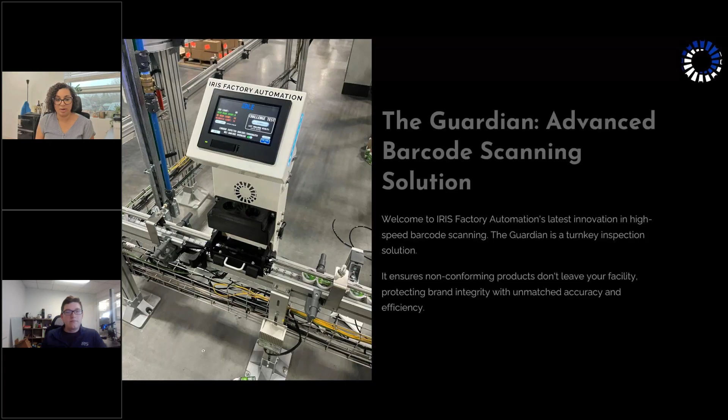So we'll get started. Just a little background about Iris for those of you who are not familiar with Iris Factory Automation. We were founded in 2013, and we have grown as a trusted partner for end-of-line packaging automation. We focus on robust, factory-proven solutions that streamline and enhance the end-of-line manufacturing process. Specifically, over the last 11 years, we focused on pre-engineered robotic palletizing, as well as custom palletizing, robotic case packing, and machine vision inspection solutions.

So today we're really going to talk about our inspection, barcode scanning in particular, but just to give you an idea of all the things that we work on as an organization.

Our team is backed by a lot of engineers. We have a full mechanical design team, robotics, controls engineering team, as well as electrical and assembly team that builds everything in our shop, and a field support team.

Some of the members here that I wanted to highlight today are the commercial facing group. Rob Fell is our president and founder. He supports all of us, from engineering to sales, and he is a great resource and has been the backbone behind Iris and our designs and innovations.

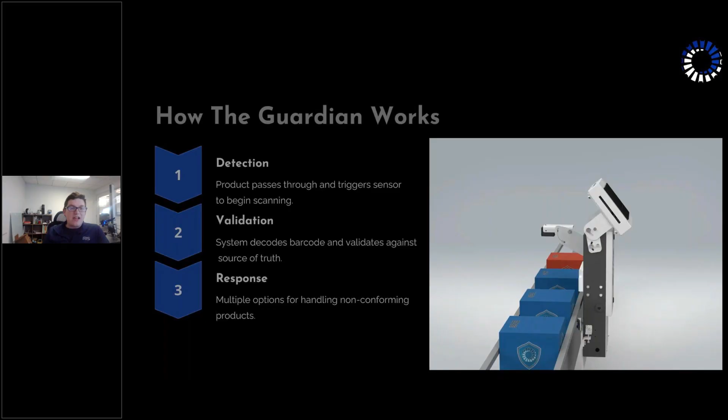So at a very, very high level, how the Guardian works is by detection, validation, and response. We boil it down to that specifically because we can customize all three aspects of those. So for detection, we're going to have product come through the system triggered by a photo eye, and that triggers the camera to start inspecting. At its core, the Guardian is a barcode scanning system.

So typically that is triggering a barcode scan to read a code, and then the next step being validate. Make sure that the code that it read is in fact the correct barcode. And that validation process can be configured in numerous ways, and we'll get into that a little bit further on. And then finally, what is the response when we detect something? So if it's good, typically that response is let it through the system and just keep chugging along.

If it's bad, we have multiple options for what do we do. We can reject, we can apply a product brake so it stops the conveyor as well as physically restrains the faulty product to make sure that no non-conforming product ever gets downstream in the production space.

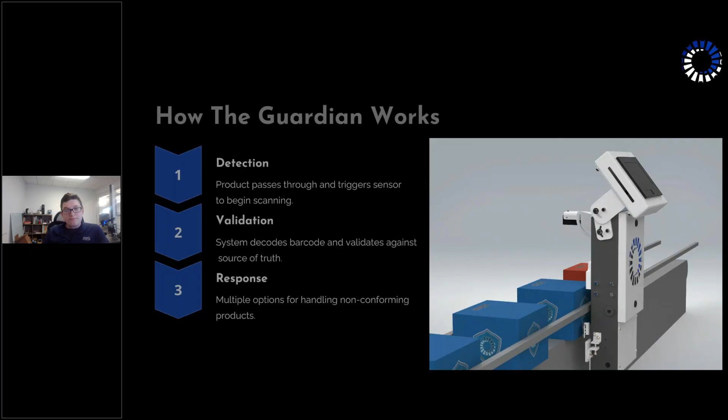And so, what does that ultimately mean for our clients? Really, highest level, the purpose of any inspection system is brand protection, right? We want to make sure that no non-conforming product leaves your facility, whether that's non-conforming because it's got the wrong label on it, the wrong lid, it's marked as a non-allergen product but what's inside is actually an allergen, or for our co-manufacturers out there, you don't want brand A product going out in a brand B package. So we're making sure that none of that stuff happens and protecting the clients in that sense.

We really highlight in the Guardian system the downtime elimination. So we want to keep productions running through both the installation and integration, but also keep them running in terms of not having to have costly stops and costly audits when an escape happens and is discovered. There's no need to stop the entire line necessarily and scour the system, make sure that there's no other non-conforming parts in there, right? We want to keep you moving, and we'll stop it, let you remove it, and keep on going.

And what's nice about this is a turnkey system. You don't need any experts on vision, barcode reading, PLC controls, nothing. This is a turnkey solution. It's going to bolt onto an existing conveyor, and we can integrate it as much or as little to your existing controls infrastructure as required.

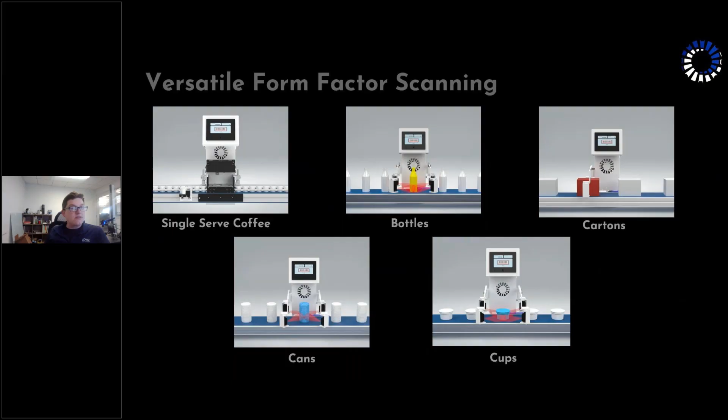And then I kind of highlighted earlier, turnkey solution, right? What does that mean? It means that we're able to plug and play during the integration phase. So we've designed this to be very small, to have as minimal impact on production as possible. So what that results in is a sub 10-inch system in terms of length on conveyor.

So as long as you have a gap on your conveyor somewhere that we can mount up to that has 10 clear inches, we can put a system on there and be inspecting parts, like I said, within an hour because it's ready out of the box. Our install process is bolted onto the conveyor, we plug it in, and we supply air if we go with any sort of air rejection. At its absolute minimum, those are the three things that we need to do.

As far as power, this is 24 volts, or if you've got an existing 110 outlet, we can plug into a 110 outlet and consume like 3 amps of 110. And then the third aspect of this is the onboard controls. So you don't need to have a PLC nearby that this is going to talk to and get it integrated with the rest of the production line. We handle all of that. Everything is handled on board.

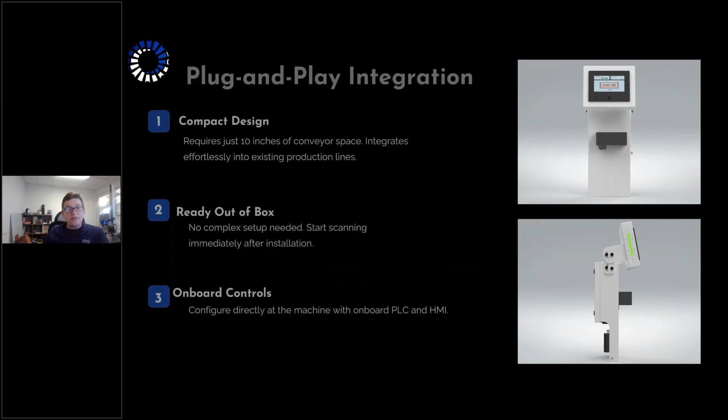So in the worst case scenario where you say we don't want to integrate with our system at all, great. We can put an air rejector on there and just blow or punch product off. We can put a brake there that then can be detected through any sort of upstream backup sensors, or we can add our own integration to more gracefully stop production lines. And a lot of that can be configured right from the onboard HMI there.

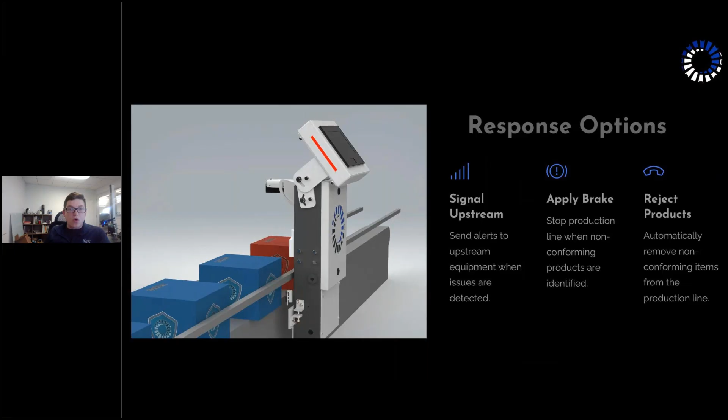So you can handle configurations as far as reject response, reject timing, controls as far as what good product is or not, right? One of those things that you're going to configure is the response options. So the three major response options that we have is signaling the upstream equipment to stop production because we've caught something defective going through. That could be done through discrete I/O or EtherNet/IP or Profinet communications.

We can apply a product brake like what's shown in the animation right now, where we're going to actually apply a brake that's going to put positive pressure and pin the product up against an opposing rail. Ideally, that's paired with the conveyor stopping as well through an upstream signal. And then the third and final response option is reject product. So this requires no stoppage of production, no stop to the upstream equipment. We're going to see a bad part, we're going to kick it off and let the system keep running.

We do have some pre-configured options in there that you can configure. Yes, I want to reject every non-conforming part, but if I see, say, 5 in a row, that is a stop condition. Or if I see, we'll call it 7 of the last 10, again, that's a stop condition. And those are all configurable directly on the HMI. You don't need to be a PLC programmer to get in there and make those changes. You can just go to the HMI, toggle, and set your setting.

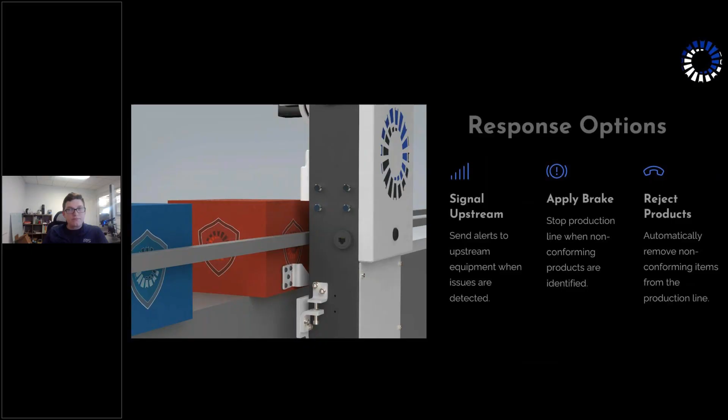Okay, so what is in the Guardian system? So like I said before, at its core, this system is a barcode reader system. So there's obviously the barcode reader itself. We do have a small micro PLC on board that handles HMI controls and all that. It handles rejection, barcode response, trigger response. We monitor for external errors on both the readers and the air input. We've got a built-in pressure switch. We've got the trigger sensor as well. And then the touch panel HMI.

The touch panel HMI is where you're going to be able to see counts: how many products have gone through, how many good, how many bad, how many times a product has gone by that we haven't read a barcode. And then what do you want to do when you see a no good? A no read? Is that the same as a no good? Do we let that go by and ignore it? And you can have your own thresholds on those settings as well.

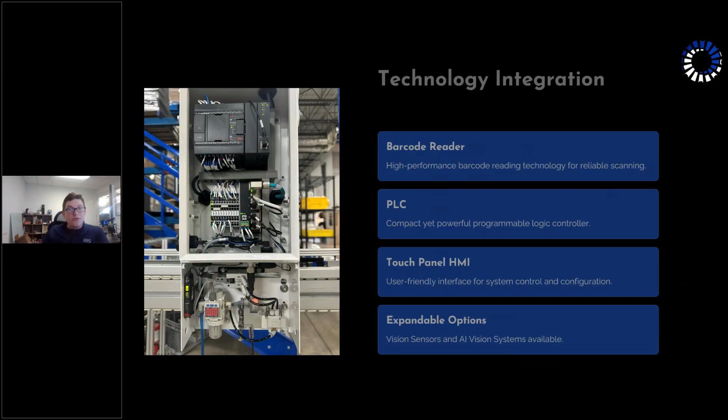And then finally, these expandable options. At its core, the Guardian was designed to be a barcode reader, but we do have options to upscale those barcodes to some simple vision sensors and some not so simple vision sensors. So we've got product that has AI OCR detection in more of a simple vision sensor form factor.

We've got full-blown vision systems that can do AI detection for random defect detection or classification of, say, a product that doesn't have a barcode, but we know that there's 25, 30 different flavors of products that run on a line that don't have a barcode to identify, we can use the graphics and some AI vision to determine that with very minimal programming.

And the key to that is easy access to that model to update it if graphics change, because marketing departments like to change graphics. Everybody always wants to see the newest, latest, and greatest. So we've designed a system that incorporates technology that makes those changes easy for our clients to handle.

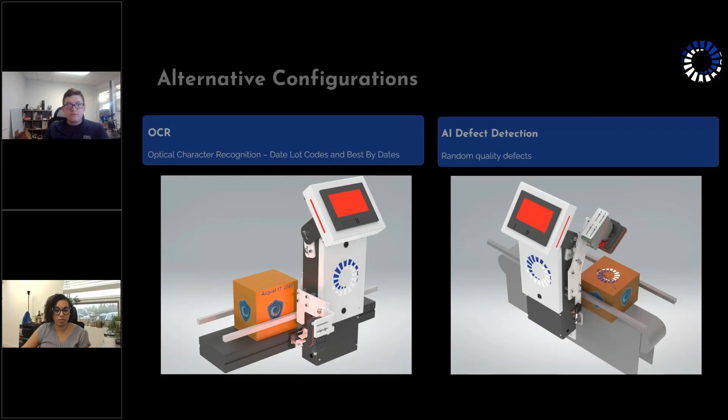All right. So thank you, Chris, for giving an overview. We're going to move to some other information that I will cover, and Chris is going to run down to the shop to get the demo prepared for the ending of this webinar. So I will let you go ahead and run down there, and I'll keep things going.

All right, thanks. So we serve a wide range of industries with this product, including food and beverage, personal care, automotive, consumer goods, really where product verification and traceability are critical. We've seen a lot of success though in food and beverage. I think that really has been the sweet spot for this with single serve coffee, cartons, bottles, cans, really all of those that fit within that food and beverage space. This has been a really successful product for them.

The Guardian solution starts at $25,000, which is really a huge value for a turnkey system. So the pricing is going to vary based on the configurations and the amount of cameras that you'll use. And really one of the biggest advantages of this system is to allocate your own engineering and programming or installation resources to some other task, right? Taking up those resources to design and program this type of solution can be costly. So we're going to deliver you a turnkey solution at a pretty reasonable investment.

So the range really can be anywhere from 25 to 35,000 depending on what camera configuration and what type of rejects that you're going to use. As far as hardware, we offer flexibility in the hardware selection. We work with leading camera providers like Cognex, Zebra, SICK, and Keyence. So really, whatever fits your specifications for your plant, we're willing to work with you to provide the best solution that fits within your scope for the project.

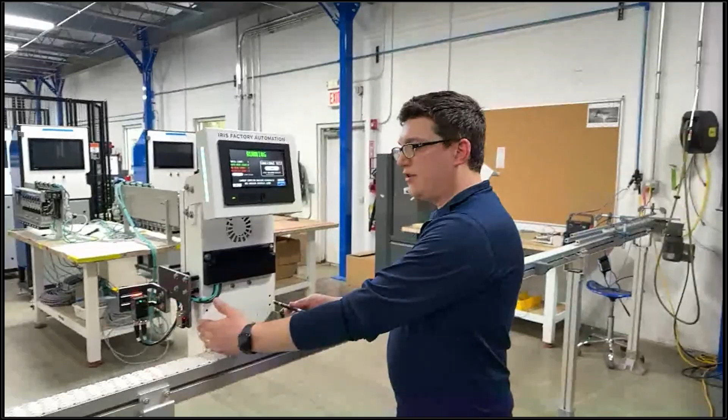So one of the things we talked about earlier was small form factor. So form factor here being your 8 inches out to out on the box itself. And then we add a couple inches off to the side here when we get to the actual reader itself, which is going to scan.

One of the things that you'll see in this is as I block a reader, it's going to keep scanning. It's going to give me a warning in that case because it had consecutive no reads. So as I scan that, it is continuously triggering. So as long as something's blocking, it's going to be looking for a code, and it's not going to register a no read until it stops blocking it.

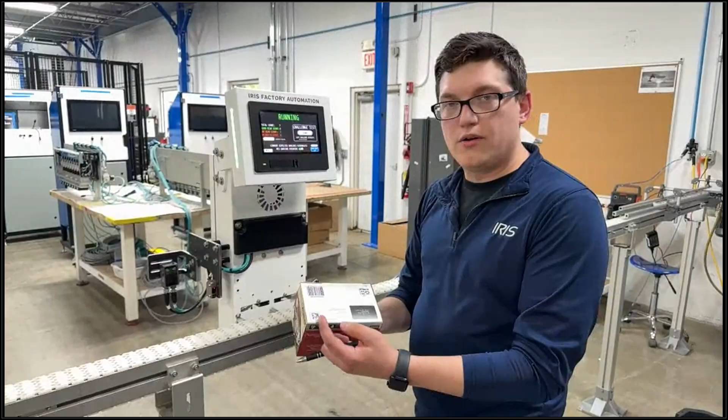What that is really nice for is as we run product through, if you've got a longer product, you don't have to get the entire product in the field of view to get the code. That code, as it traverses, can come through. So even if it's not in the field of view when you first trigger it, when it gets into the field of view later, it knows that that's still the same product because it never lost that trigger.

So I'll highlight a couple of really nice-to-have features that are creature comforts. We've got LED lights that span all the way across the side, top, and bottom of the HMI box. That's going to let you know the rough status of the piece of equipment. If I throw a no good product in here by hand, it'll let you know. So flashing red is bad. There's an alarm. I can reset that. And we can put those resets, especially for non-conforming product, behind any sort of user login password to make sure a supervisor needs to come by and reset.

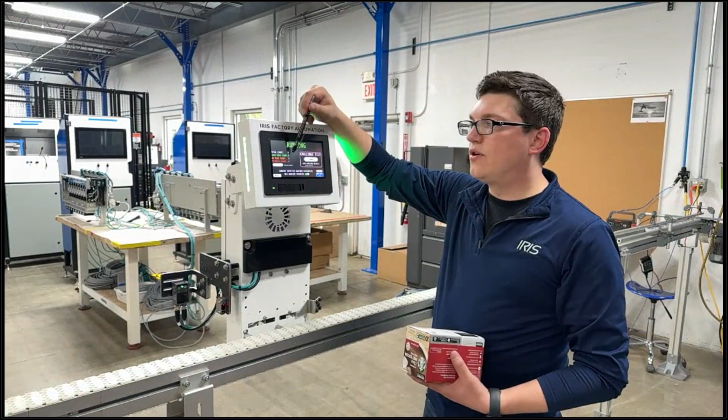So at a high level on the HMI, it's going to give you an overall status and some counts: good, no good, no read and mismatch. We can do challenge tests where you put a bad part through; it won't count towards your negative metrics, but it'll verify that everything is up and running so you never get caught without it running. We can override manually what code we want to read. We can also receive that from any sort of onboard system that might track that internally that you have in place already.

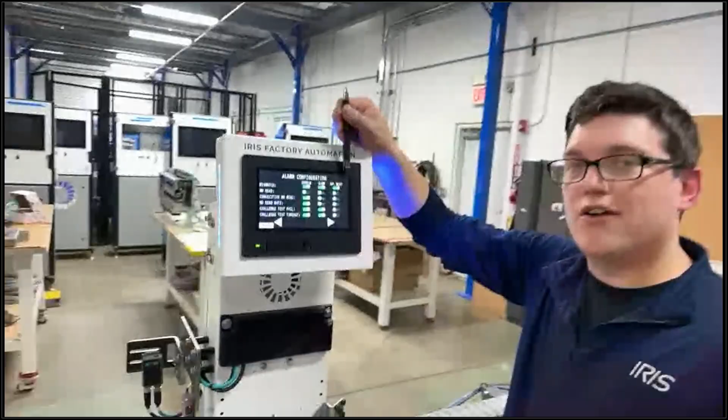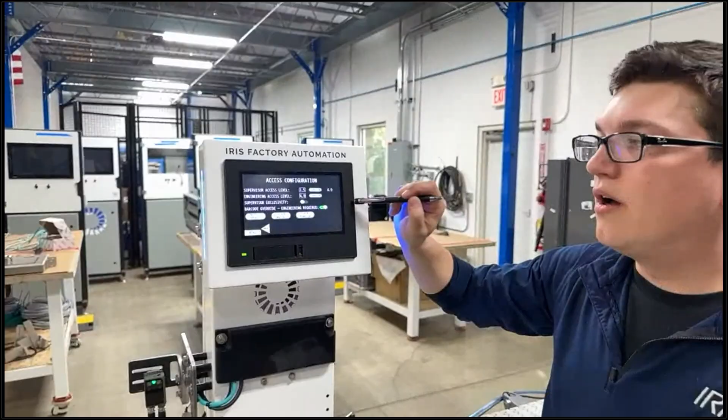As we go through the menus, this is where we're talking about all the configurations. So I can set how many no reads in a row is bad, no read rates, break delay or reject delay. We can enable the system, and then we can configure alarms. So I can have here that any mismatch is an alarm. It's enabled, it's an alarm. Enabled means it'll tell you if it happens, even though it's a warning. Alarm will stop or reject. And supervisor reset requires us to have somebody log in. So every single alarm is configurable to that extent. And then you also have some higher access controls as far as who can change what settings.

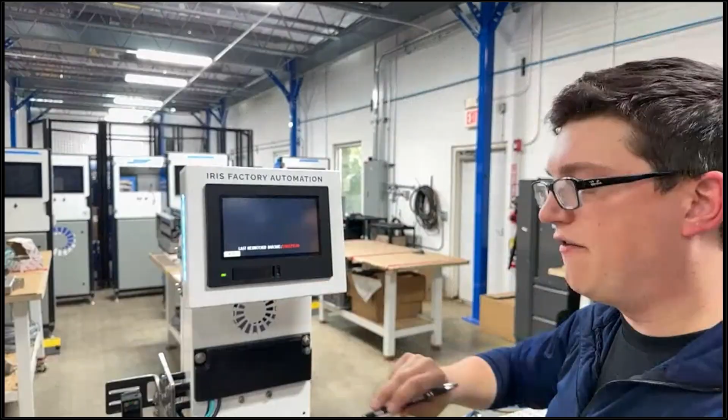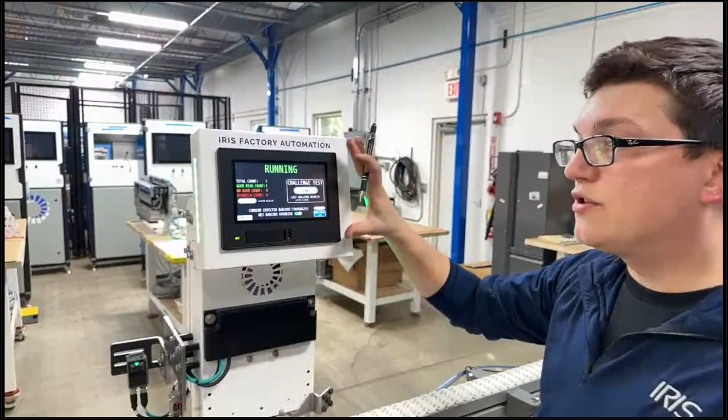We have a quick diagnostic that'll tell you status of inputs and outputs. We put a QR code on here, and that QR code will take you directly to the Iris support site. So if you ever have a question for one of our support engineers, you can follow that on your phone. It'll take you directly and you can submit a ticket. And then we can get a live stream view into the reader on the screen, so you can see what's happening on the reader, as well as what the code was the last time there was a mismatch. And finally, you've got alarms, both active and alarm history. So it's a small HMI, but it has a lot on here and really allows for user configuration as a whole.

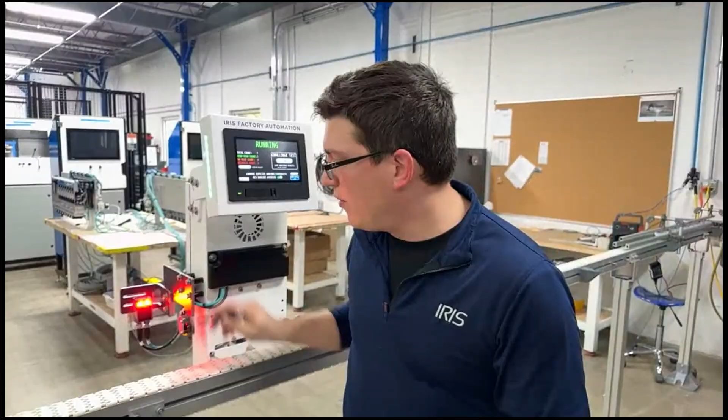So as we talked about, you have a programming port on the side for the reader code. Right now we have a Keyence reader on here. These systems can be configured with any number of readers and brands. So Keyence, Cognex, SICK, Zebra, any of the big names we can integrate directly into the system, really with no major changes. Same functionality throughout. So we'll go straight into a demo showing what it does on a carton system.

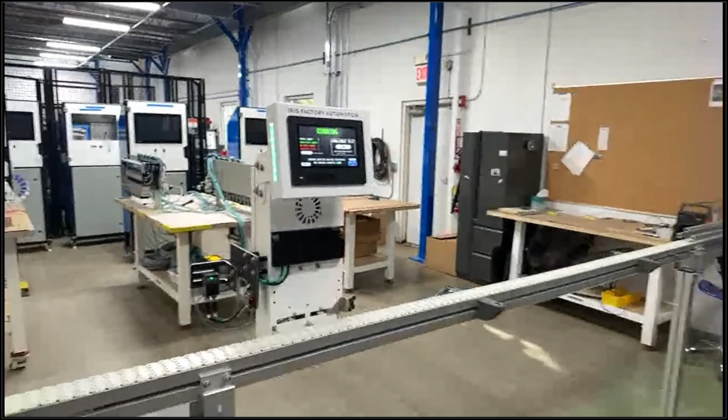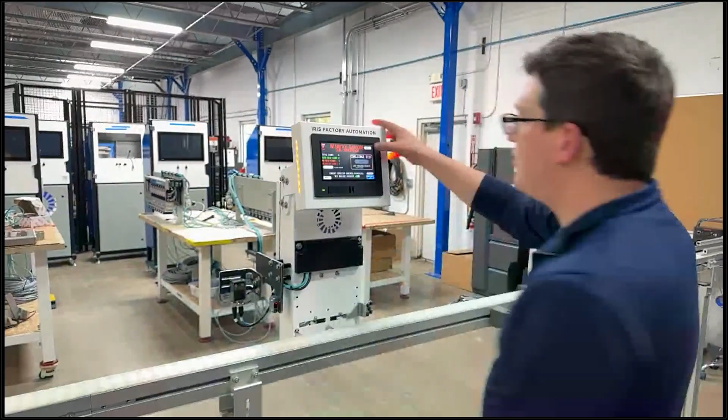So first, just throwing in some good product, showing that as it reads the correct code, we'll go through. And if we throw the wrong product on, it'll fault, pick it off, and then that is going to require me to reset with a supervisor level and start again. So another example of bad product going through.

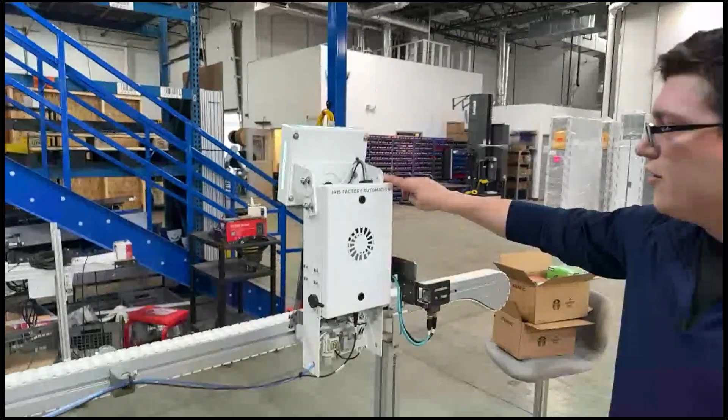So good product, and then another bad, picked off. If you want to walk around and show the backside too, just do it real quick. Yeah. So on the backside, you've got your electrical panel here that has all your electronics that we showed earlier, PLC, Ethernet switch, and terminal blocks for power distribution.

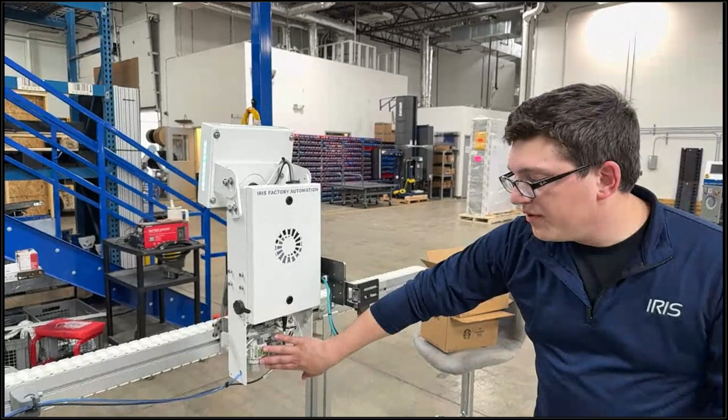Down below, we've got the filter regulator with a digital pressure switch, so we can monitor to make sure that we have adequate air to handle both rejection and cut brakes. A high-speed solenoid, and then right down here is a pneumatic actuator that handles that rejection mechanism. Again, that can be changed out for an air knife if we do air blow-off rejection as well.

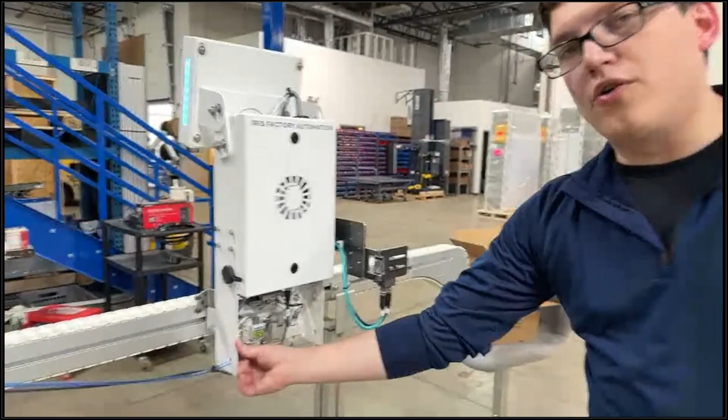And then you can see also our two utility connections. So in this case, it's a simple M12 4-pin electrical cable that goes to 24 volts, or can go to an on-machine power supply that will turn 110 into 24 volts. And then in this case, a 6mm or 1/4-inch air line for our air supply. That kind of covers us as a quick overview of what and where and how.

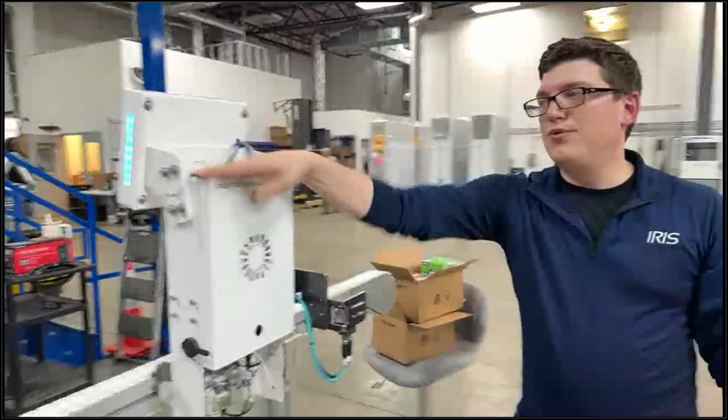One other thing I guess we can highlight is the HMI itself can actually tilt. So if you have that 8 inches of conveyor space that's necessary, but it's on an incline, we can be mounted on an incline, and this HMI can tilt up to, I believe it's 15 degrees, so your HMI is not on an incline, so it's easy to use still from an operator standpoint. So really designed it to be as flexible for installation as possible.

And from there we'll go to questions. One question we didn't answer, Chris, is how do you program new SKUs? Yeah, absolutely. So there's really four different ways that we can handle new SKUs. The most automated way is through integration.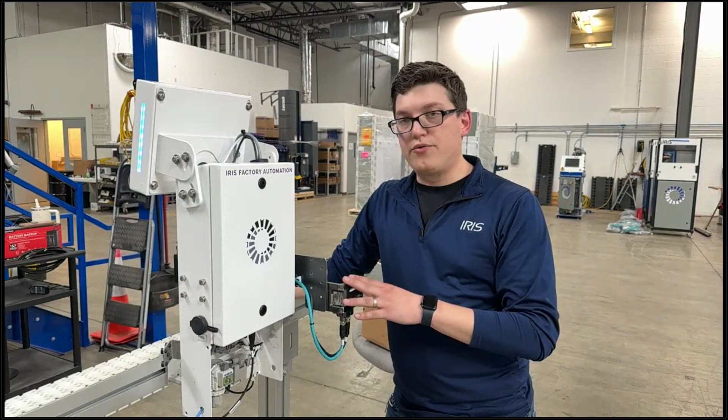We can integrate to a line side PLC or any enterprise level software that handles that, and we can actually take that code from a PLC or software that is supposed to be running on the line, automatically load that into the software, and send it to the barcode reader. So that's highest level of automation. Lowest level of automation is user input. There's a keyboard that you type in whatever the code is supposed to be, and then whenever you change that, it updates. And then there's the ones that are in between.

So we've got one that we can do either an external reading device, a handheld or fixed, or you can utilize the reader that's already embedded here, depending on the type of code that you're looking at, and scan a traveler. So the sheet that goes along with an operator as they set up the machine for a changeover, they can just scan that. That'll populate whatever the barcode is and set it up that way.

And then the fourth way is there's a button on the screen. It's just set correct barcode, and the first code that this scanner reads is what the code will be. So if you're running a new production and you're getting ready to change it over, just hold back that first line, hit that button, and then the very first one that goes through, as long as it's the right code, will set what all the other codes are supposed to be.

That's good if you've got a lot of changeover and you want to automate that process a little more. The flip side is usually you still want somebody here hitting the button because you want to verify that the first one that goes through is the correct one from the new run.